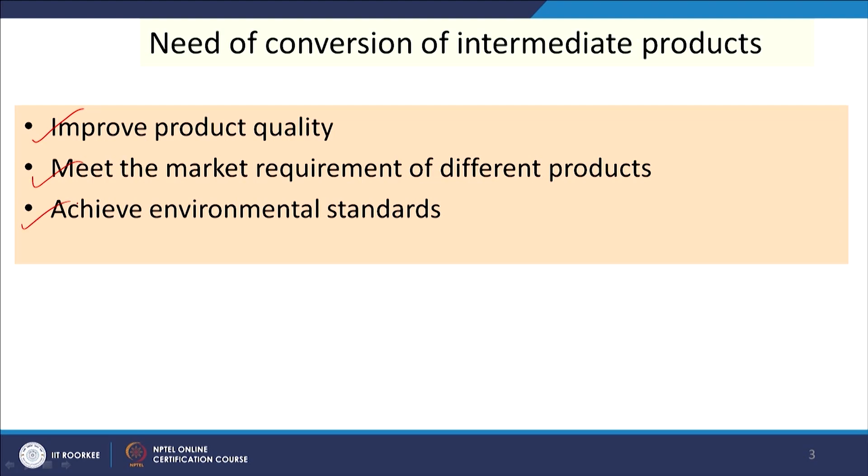Now, we will discuss the carbon rejection routes, that is basically cracking. It takes place in the presence of catalyst or in the absence of catalyst. Cracking means the application of heat to crack the bigger molecules of hydrocarbons into smaller ones. So, we can get more amount of lighter liquids, and that is the main objective of cracking. And if we apply catalyst, the high temperature requirement of the process is reduced to some extent.

So, we have two types of cracking, one is thermal cracking, another is catalytic cracking. The thermal cracking temperature is around 500 to 700 degree centigrade and pressure is around 70 atmosphere, whereas if we use catalyst, the temperature may be 475 to 530 degree centigrade and the pressure requirement is also less, that is 20 atmosphere. If we apply this cracking process, in the thermal or catalytic path, the higher hydrocarbons will be converted to lower ones, and the two processes have different mechanisms of this conversion.

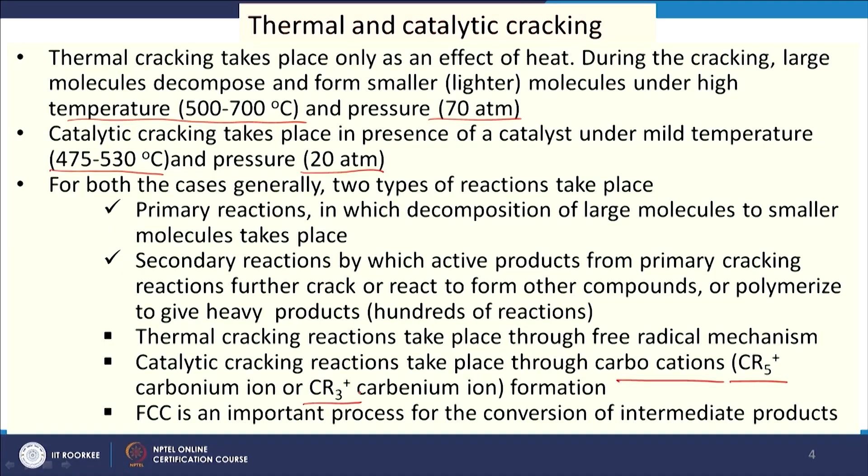The thermal route follows the free radical mechanism, whereas the catalytic route follows carbocation production, that is carbonium ion and carbenium ion production. So, there are two, CR5 plus and CR3 plus, that is carbonium and carbenium ion respectively. So, the mechanism is different and the energy requirement is also less for the catalytic route, that is why it can take place at lower temperature.

Now, we will see the catalytic route, that is fluid catalytic cracking, where the catalyst is used in a fluidized bed and the feed is passed through the reactor. This is the riser part of the reactor, and here the catalyst is coming as recycled. The catalyst and the feed react here, and we get the product on that side, and the catalyst after use in the reactor comes to the regeneration part, and after regeneration it is again recycled.

So, this is a closed circuit where the catalyst and feed come in contact and give us the required product. So, this is one fuel which has less requirement in the market, and we want to convert it into another fuel which has more requirement. So, this is the concept, or the description, of the FCC process.

Now, what feedstock can we use in this process? Different types of feedstocks have been used, like vacuum gas oil, hydrotreated VGO or vacuum gas oil, hydrocracker bottom, coker gas oil, deasphalted oil, reduced crude oil and vacuum residue. Any one of these feedstocks can be processed, so that we can achieve more valuable products.

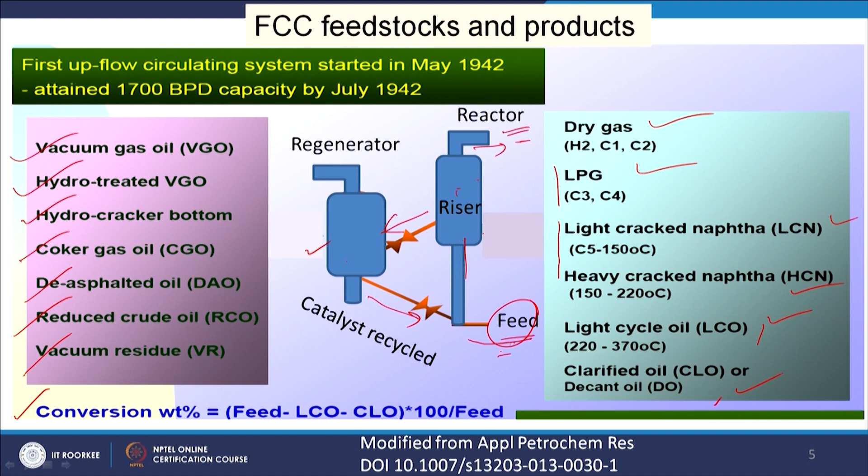So, we will see catalyst to oil ratio. There are Indian and foreign FCC units. So, typical properties are shown here, that is catalyst to oil ratio 7 to 9 for foreign unit and 5 to 9 for Indian unit. Reactor riser temperature, that is 540 and this is 490 to 510. Reactor contact time, that is also very important, that is 1 to 8 second, here 1.5 to 3 second.

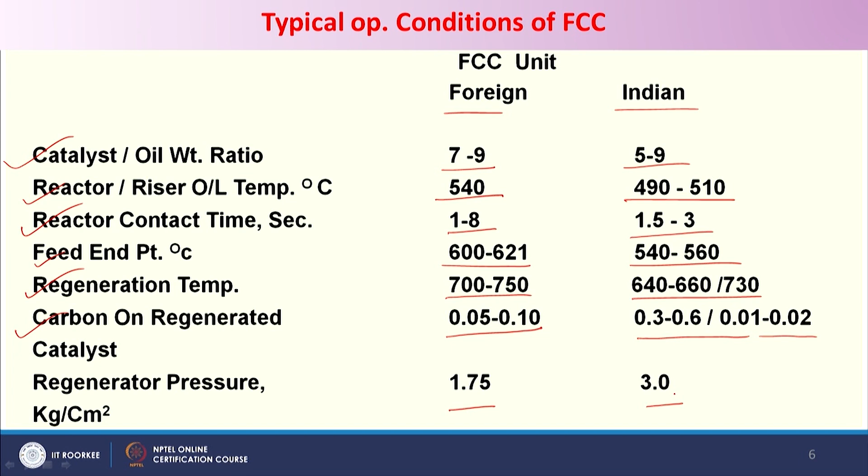Feed endpoint, that means what type of feed we are using, that is 600 to 621, here 540 to 560. Regeneration temperature, that is related with the catalyst, here it is 700 to 750, here 640 to 730, and then carbon on regenerated catalyst. So, the extent of the regeneration of the catalyst is indicated by the carbon deposited on it, and for foreign units this one is 0.05 to 0.1 and this is 0.3 to 0.6 or 0.01 to 0.02. Regenerator pressure, that is 1.75 kg per centimeter square, here it is 3 kg per centimeter square. So, these are the comparison of two FCC units, in India and in foreign.

Now, we will see the reaction mechanism and how the cracking takes place when we choose the FCC process. So, in this case there are a number of steps. First initiation takes place, then propagation, then cracking, and then isomerization and cyclization. So, we will see how the cracking reaction initiates. We have one hydrocarbon, and then we have catalyst. So, protonation can take place with this hydrocarbon. One H plus from this is coming here and being added to this CH. So, this CH plus.

Then another process may be possible, this may be catalyst. So, that will take one hydrogen from this. So, R1 CH2 CH plus and then we are getting here R2. So, this way protonation or hydrogen abstraction takes place, that is the initiation. So, we are getting now the carbocation. That carbocation will react with another hydrocarbon and then there will be some hydride transfer. So, this is called propagation step.

So, here we had plus charge and another hydrocarbon. So, this charge has shifted here and now we are getting this one and R2 another hydrocarbon, and this charge is shifted to this one. So, that is why this is called hydride transfer. From one hydrocarbon to other hydrocarbon it is transferred, and then the cracking step.

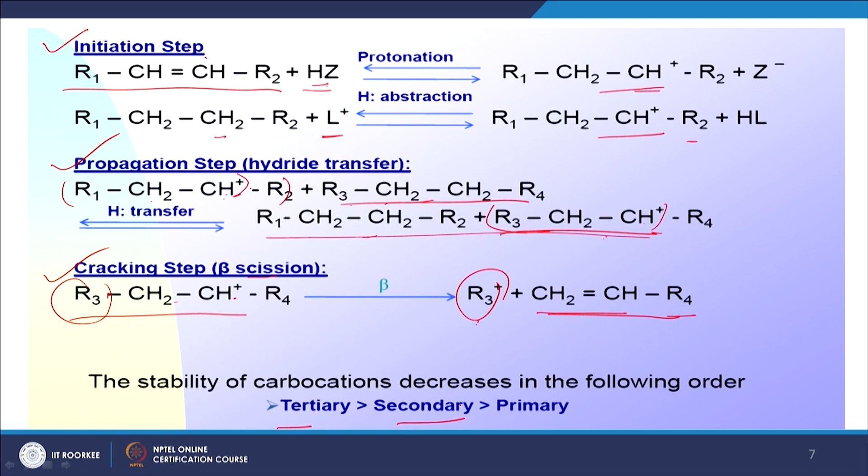And now, the carbocations which are produced here, what type of carbocations? We are discussing here that this hydrogen transfer takes place from one to other hydrocarbon. So, if the carbocation is more stable. Out of these two, which one is more stable, this one or this one? This we have to decide, and if we can decide, then we can predict whether this conversion will take place or may not take place. So, this carbocation may be tertiary, secondary or primary in nature. It is shown that the tertiary has more stability than secondary and then primary. So, that way product nature will also change.

Then isomerization may also take place. We have one secondary carbenium ion in this case, so there may be some isomerization. This H plus, you see, so R CH2 and C plus CH3 CH3. So, this can also take place, that is called tertiary carbenium ion. So, secondary to tertiary formation can also take place, and then some cyclization reactions can also take place in this process. As shown here, this is our hydrocarbon, and this is converted to cyclic form. Also two hydrocarbons can make this one. Okay. So, that way the cyclization reaction can take place, and alkylation, condensation and polymerization can also take place.

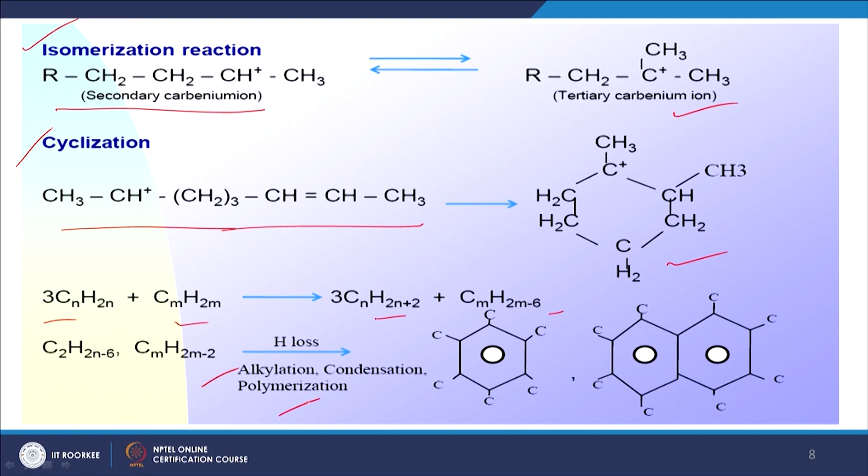Alkylation may take place, condensation may take place and polymerization may take place. So, these are the different types of reactions which can take place during the FCC process.

Now, what are the factors that influence the FCC performance? Already we have mentioned some of those, that is the independent parameters on which it depends: the feed rate, then recycle ratio, feed preheat, riser top temperature, reactor pressure and fresh catalyst activity, that is, the extent of regeneration of the catalyst, and then fresh catalyst selectivity also, so that we can get a particular product to a higher extent.

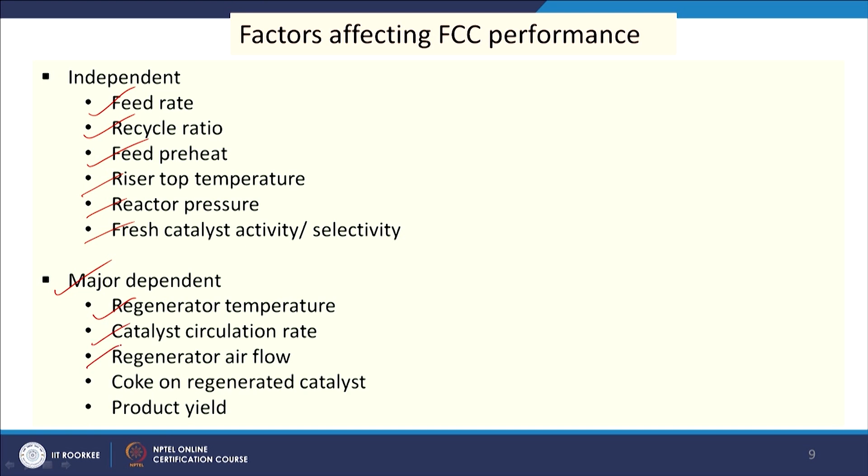And some dependent variables are also there, that is regenerator temperature, then catalyst circulation rate, then regenerator airflow, coke on regenerated catalyst and product yield.

Now, we will see another type of cracking in which hydrogen is added. So, if we add hydrogen, then we will be getting more liquid and at the same time we will be able to remove some sulfur, nitrogen, etc. So, that is the advantage of these hydrocracking reactions, and we see different types of feeds are also used for this process and different products can also be achieved.

So, some examples are straight run gas oil. So, gas oil which is produced directly through the fractionation in atmospheric distillation, that can be used. Vacuum gas oil which is obtained from the vacuum distillation column, that can also be used. Cycle oil, coker gas oil, thermally cracked stocks and solvent deasphalted residual oils.

So, after solvent deasphalting, the liquid we get can also be used for hydrocracking, and then straight run naphthas and cracked naphthas. So, those are the feedstocks for this hydrocracking process, and some products are liquefied petroleum gas, LPG, motor gasoline, reformer feeds, ATF, diesel fuels, heating oil, solvents and thinners, lube oil and petrochemical feedstocks.

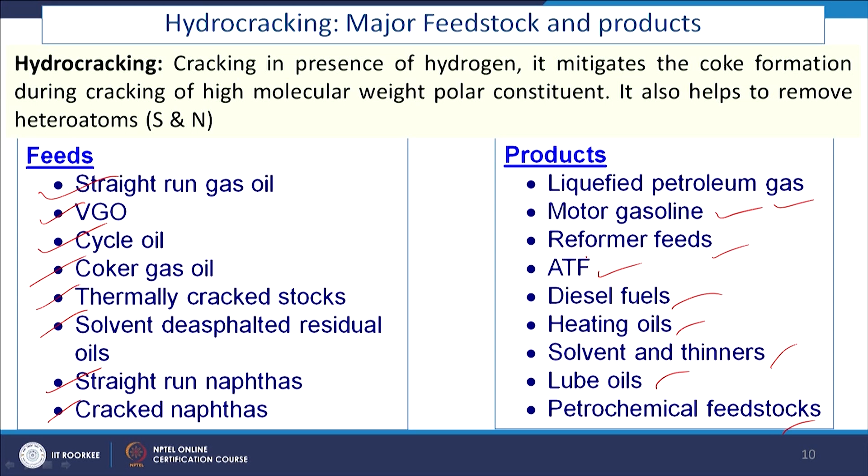So, once we are getting naphtha, the naphtha is converted to petrochemical feedstocks. So, that is the use of this, and we will see the chemistry of this hydrocracking process. So, like the FCC process, here also different types of reactions can take place, and obviously hydrogen addition is taking place here.

So, we will get some hydrogenolysis. We will be adding hydrogen, and that hydrogen will break the structure, say here benzothiophene. So, due to the addition of hydrogen, this structure is broken here. So, lysis is taking place. So, there is hydrogenolysis: due to the addition of hydrogen, we are getting some lysis in the structure of the organic compound, and then similarly quinoline and this one.

Then hydrogenation, say polyaromatics hydrogenation. So, we have one naphthalene. If we add hydrogen, this unsaturation will be removed. In one ring it is shown, and in the second step the unsaturation in both rings is removed. So, that way hydrogenation can take place, or hydrodealkylation can take place.

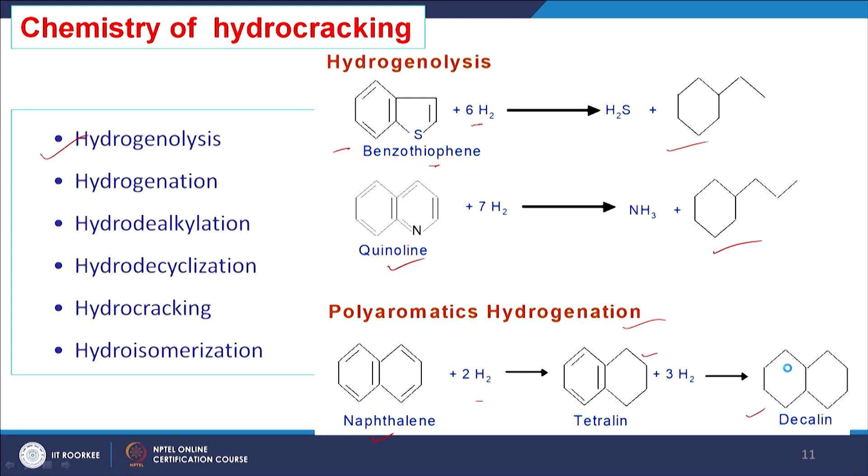Hydrodealkylation can take place here, say this is one aromatic hydrocarbon, and we are adding hydrogen. So, then we are getting hydrogen addition here plus dealkylation; the alkyl group is removed from this ring. So, this type of reaction can also take place. Another example is here, where only dealkylation has taken place.

And then hydrodecyclization. So, if we have this type of compound, a cyclic compound, and we add hydrogen, there will be some cracking and then hydrogen addition. So, we are getting these two different compounds here, which do not have a cyclic structure. So, here decalin plus hydrogen gives this type. So, these are some typical examples, and a number of reactions may be possible under the reaction conditions.

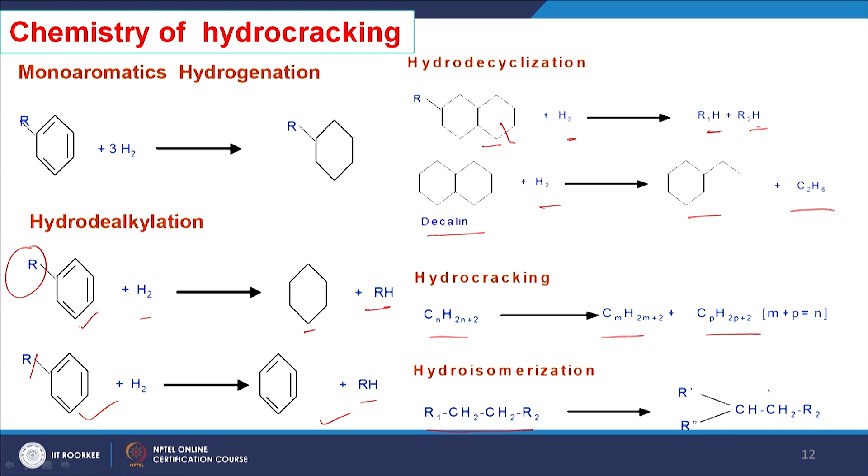And then hydrocracking can take place. So, this is the cracking of bigger molecules, converted to smaller ones. Hydroisomerization, some isomerization can also take place. So, this is one hydrocarbon, and this can be converted to this one, its isomeric form. So, different types of reactions can take place during the hydrocracking process or in the hydrocrackers.

So, if we think about the catalyst and its properties, the catalyst will have dual functions. One is cracking, and another is hydrogenation or dehydrogenation. These are the basic processes available during the whole process. That is why the catalyst should have two sites, one will favor cracking, another will favor hydrogenation-dehydrogenation reactions.

So, for the cracking reactions, the active sites are acidic in nature, and some examples are silica-alumina or crystalline zeolite, modified zeolite along with binder. So, these are some examples of acidic sites in the catalyst, and there will be other sites for hydrogenation-dehydrogenation, and these sites basically contain metals, that is noble metals, maybe platinum, palladium, or non-noble metals like molybdenum and tungsten, or nickel, cobalt has also been used to increase the hydrogenation-dehydrogenation capacity of the catalyst, with noble metals less than 1%, non-noble metals 2 to 8%.

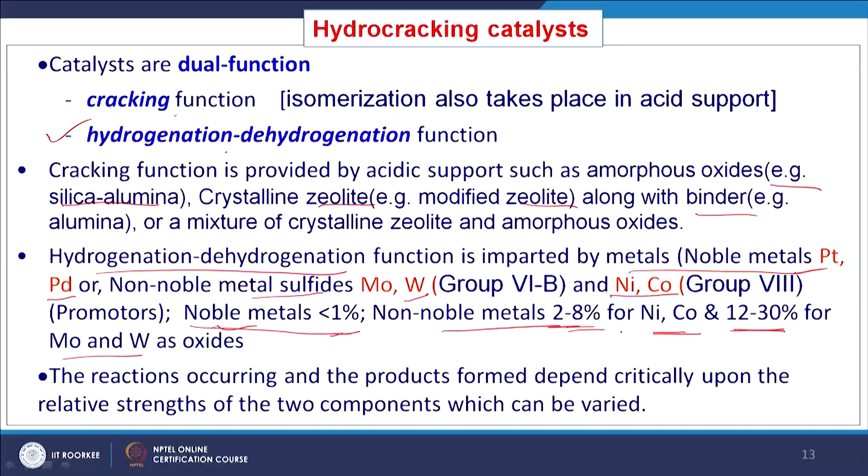Now, what type of reactions will take place? What will be the product distribution? That will depend upon the extent of the acidic sites and the basic sites of these two catalysts. So, accordingly the product pattern will change, and depending upon the feedstocks the number of active sites can be monitored, and the catalyst can be designed. Some examples we will show here.

So, these are our desired reactions. We want to hydrocrack naphtha to LPG or gas oil to gasoline. For this, our catalyst should have strong acidic sites, moderate hydrogenation activity, high surface area, and low to moderate porosity. But when we go for gas oil to jet fuel and middle distillate conversion, or gas oil to high viscosity index lube oil conversion, then we need moderate acidity and very strong hydrogenation activity. So, we need to add more hydrogen in this case, and surface area is high.

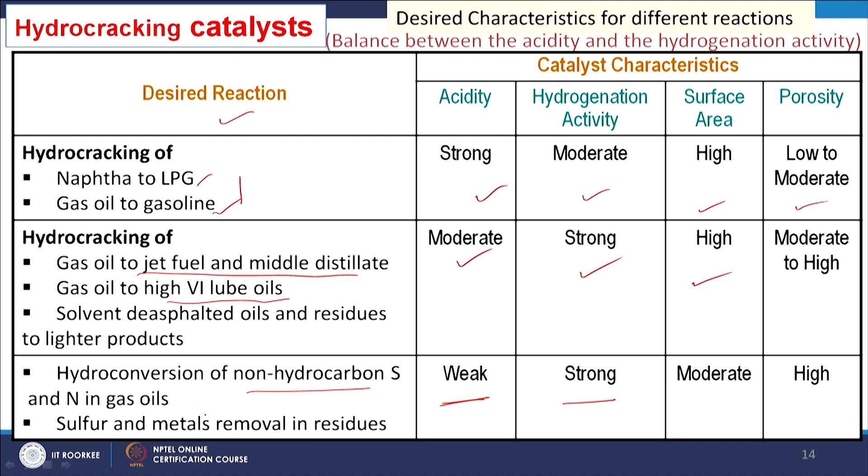Similarly, when we go for hydroconversion of non-hydrocarbon sulfur and nitrogen, we do not need that acidic behavior, because our objective is to remove the sulfur and nitrogen, so cracking of the molecules may not be that important. In that case we use weak acidity, and hydrogenation has to be strong, because S and N have to react with hydrogen to give H2S and NH3. So, depending upon the nature of conversions we want to achieve in this process, we can design the catalyst as per our requirement.

Now, we will see the process of how hydrocracking takes place. Here we need hydrogen and feedstock, and we have to provide temperature and pressure. So, here we provide make-up hydrogen with some pressure and fresh feed. It is preheated, heated again, and comes to reactor stage 1, the first reactor for hydrocracking. After reaction the product is cooled down and goes for pressure release to the high pressure separator. From the high pressure separator we get some gas, which is recycled with hydrogen.

So, it goes into this loop, and the liquid part goes to the low pressure flash, where we reduce the pressure again. From the low pressure flash drum we again get some gas, and the remaining part goes to the debutanizer with some pressure reduction. Butane is recovered here, then it goes for fractionation, and in the fractionator we get different products: light naphtha, heavy naphtha, kerosene, gas oil, etc. The residual part is added with make-up hydrogen and, after preheating, enters reactor 2. The second stage conversion is to get more liquid conversion.

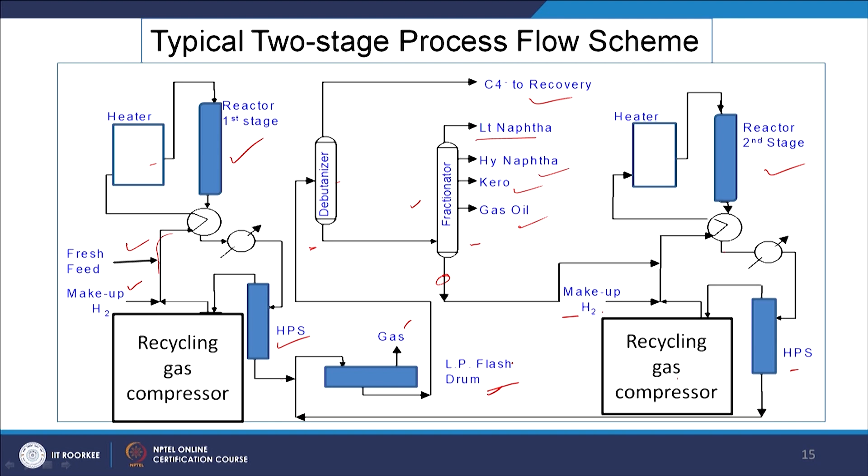From the second reactor it is again cooled down, and then goes to high pressure separation. Then we flash it, and after flashing the pressure reduces. The vapors are added with the hydrogen for recycling and help further hydrocracking. The bottom part is sent to the low pressure flash drum, again for the recovery of gases. So, this is the overall flow sheet followed to perform the hydrocracking of different intermediate products.

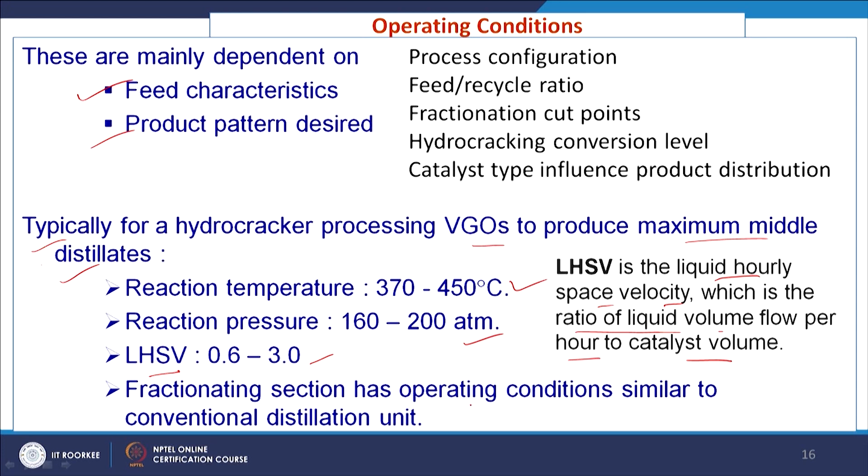Now, we will see the operating conditions. These mainly depend on feed characteristics and the product pattern we desire, which we have already discussed, and some typical examples are given here. For a hydrocracker processing VGO to produce maximum middle distillates, the reaction temperature is around 370 to 450 degree centigrade, reaction pressure is 160 to 200 atmospheres, and LHSV is 0.6 to 3.0. LHSV is the liquid hourly space velocity, the ratio of liquid volume flow per hour to catalyst volume. The fractionating section has operating conditions similar to a conventional distillation unit. So, these are some operating conditions.

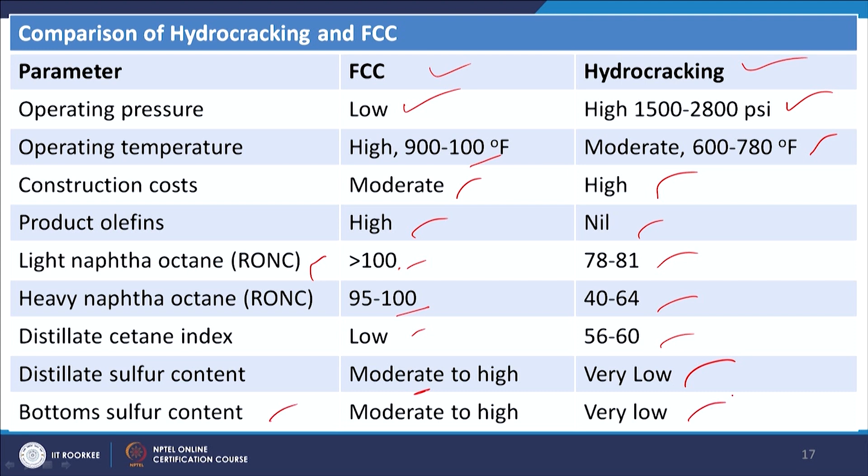and distillate sulfur content, obviously in this case we will be having moderate to high because sulfur removal does not take place in this case, but here in hydrocracking sulfur removal takes place. So, it will be very low sulfur; bottom sulfur content is also very low in this case of hydrocracking. So, that way we can compare the FCC and hydrocracking process.

Now, we will see the reforming and isomerization process. So, reforming will reform some products to other ones. So, basically in this case it helps to produce high octane number reformate, and different types of reactions which we get here, that is naphthene dehydrogenation, paraffin dehydrocyclization, linear paraffin isomerization and naphthene isomerization. So, dehydrogenations and isomerizations are desired

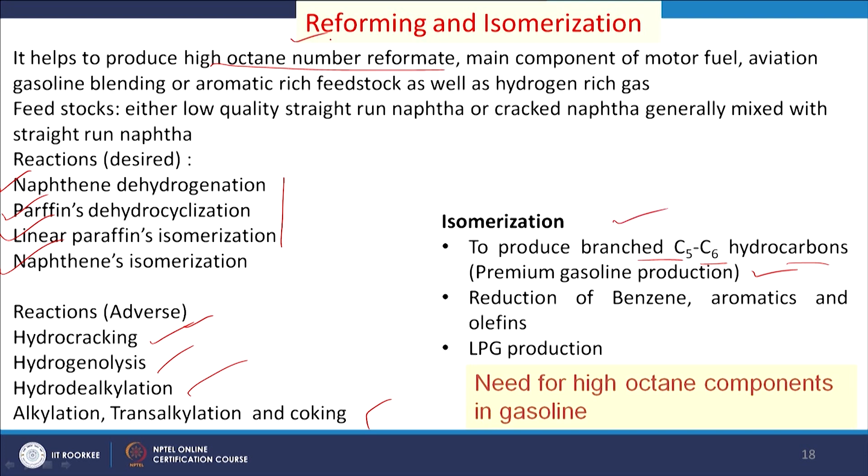reactions, whereas adverse reactions which can take place here are hydrocracking, hydrogenolysis, hydrodealkylation, alkylation, transalkylations and coking. So, these are not desired for the reforming, and isomerization is required to produce branched C5, C6 hydrocarbons, that is gasoline product. So, when we need more gasoline or to improve the quality of gasoline, this reaction is preferred. Reforming is also preferred to increase the octane number.

Then we can add some blending. So, blending is possible. That can help to improve the quality of the product as well as to meet the requirement of specific fractions. So, some examples we will show here. So, typical motor gasolines may consist of straight run naphtha from atmospheric distillation, plus cracked gasoline from FCC crackers.

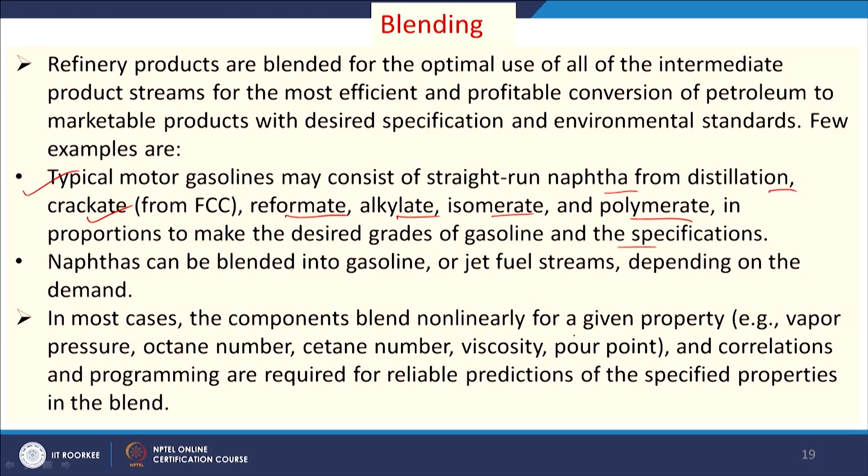If we can make a proper blend, we may add reformate. Reforming is also giving us gasoline, that part can be blended, along with alkylate, isomerate and polymerate. So, different reactions can give us gasoline type product. So, if we mix it, then ultimately we get a gasoline blend, and that may have higher octane number than the straight run gasoline. So, in most cases the components blend non-linearly for a given property.

That means, if we mix these different gasolines from different sources, what will be the property after mixing? Normally it is not linear, it is non-linear, and some correlations are developed to predict what the properties will be. Then polymerization and alkylation are other types of reactions which are also used for the conversion of one intermediate product to another form.

In polymerization, the light olefins are induced to combine or polymerize into molecules of 2 to 3 times their original molecular weight. So, smaller molecules are converted to larger ones. The catalysts employed are acidic, that is phosphoric acid on pellets of Kieselguhr. It requires high pressure in the order of 30 to 75 bars, and temperature of 175 to 230 degree centigrade.

And this polymerization derived gasoline may have higher quality. Some example is shown here. Polymer gasolines derived from propylene and butylene have octane numbers above 90. Alkylation reactions also achieve long chain molecules by combination of two smaller molecules, one being an olefin and the other an isoparaffin. Sulfuric acid or hydrofluoric acid can be used for these reactions.

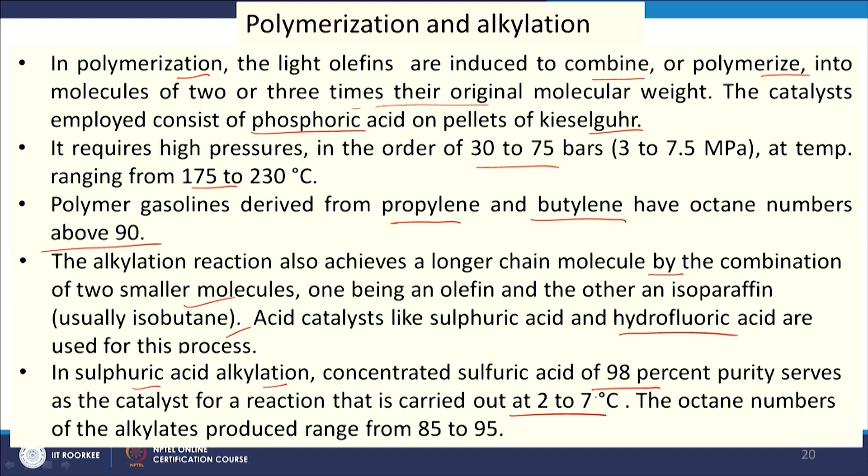In this alkylation, when sulfuric acid is used, it is 98% concentration, and the temperature is 2 to 7 degree centigrade. The octane number of these alkylates may be 85 to 95. So, isomerization, polymerization, alkylation, all these processes help to increase the octane number and give better quality gasoline. So, we have discussed different types of reactions which we can use to convert one form of liquid to another to meet the market requirement as well as to improve the quality of that particular liquid fraction.